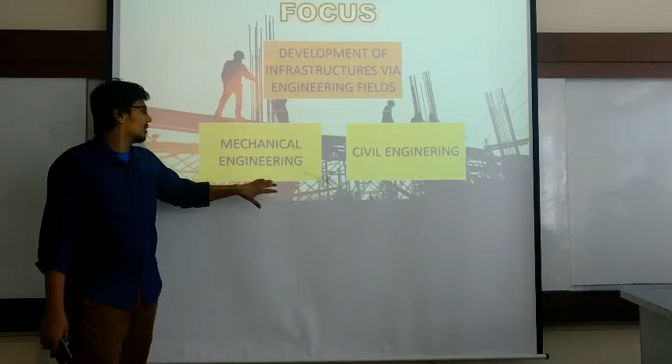Now I'll focus on our chosen theme, which is the development of infrastructure via engineering fields. Engineering fields are quite famous nowadays. Under engineering, we have chosen mechanical engineering and civil engineering as our examples for today's presentation.

First of all, mechanical engineering and civil engineering are among the fastest growing fields in globalization. So we will take these as examples for our further presentation.

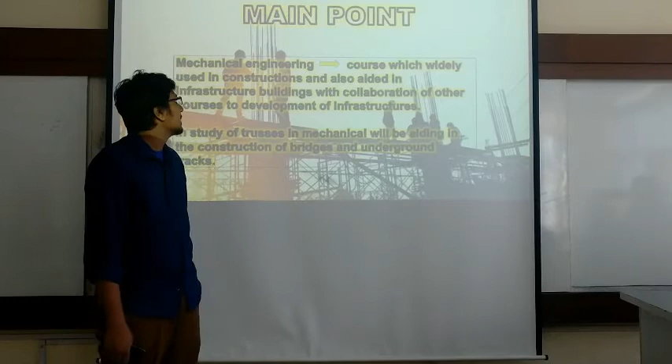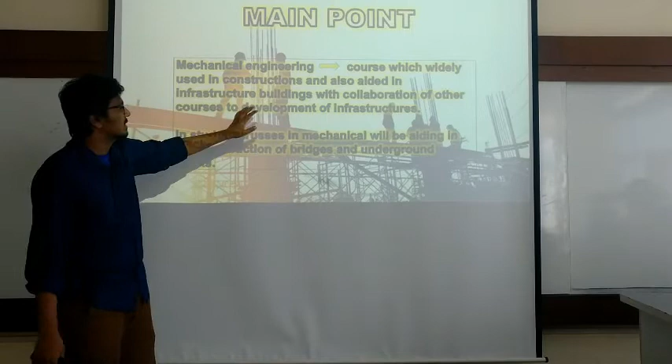Now I will take the mechanical part. Let's see what mechanical engineering is. Mechanical engineering is a course widely used in construction, aiding infrastructure building in collaboration with other courses for the development of infrastructure.

For example, the study of trusses in mechanical engineering aids in the construction of bridges and underground tracks.

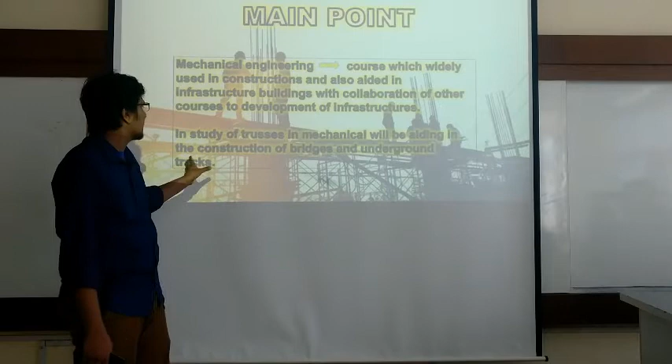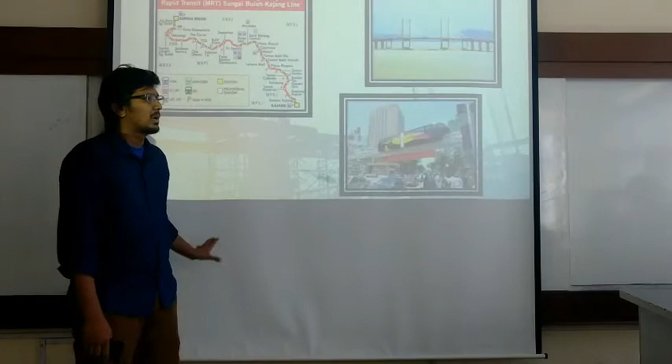For example, we have the MRT and some other examples. This is actually the latest MRT Sungai Buloh-Kajang line track, and this is the map of it.

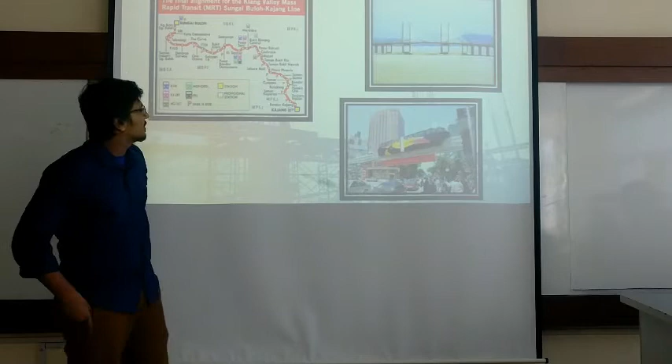As we can see, this is one of the highest budget Malaysian constructions, which had been aided by mechanical engineers and civil engineers, from our point of example.

And also over here we have the Penang Bridge, and this is also a picture of the monorail example, which has been transported through the city of KL.

So from here, I'll pass it on to my partner Mano Kumar to give a further explanation of the civil engineering course.

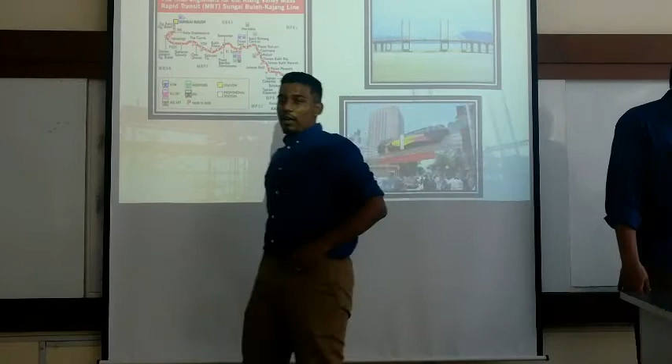Okay, hello guys, how are you all? I hope all of you are fine. Before I go to my main point on this topic, I would like to ask you all, how many of you are from the civil engineering field?

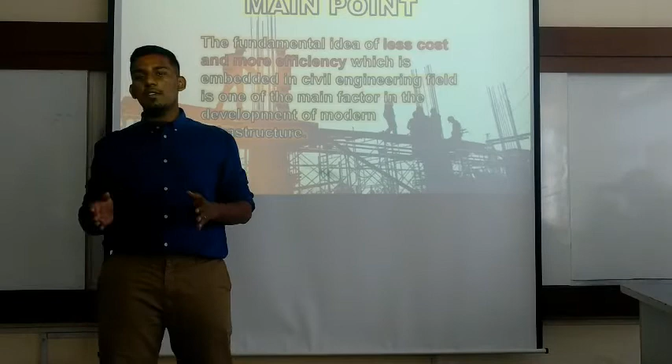Okay, so quite a number of you are taking the civil engineering course, and I'm pretty sure you have gone through 2 semesters, which is quite important, and you could have studied the basic things. So the main point here is one of the fundamental ideas in civil engineering.

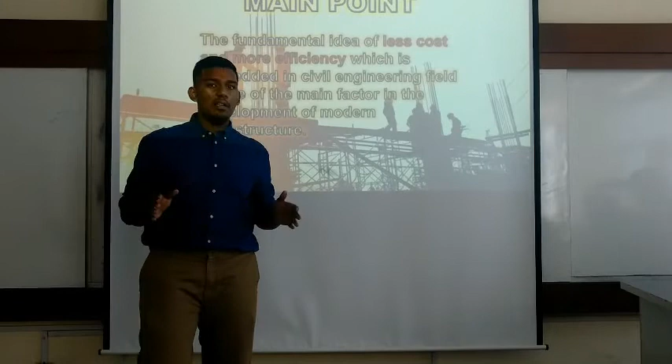As you all know, civil engineering is basically about construction. That's the basic thing people have told you before applying to university courses. So the fundamental idea of civil engineering, based on construction, is that less cost and more efficiency is the term we need in the civil engineering course.

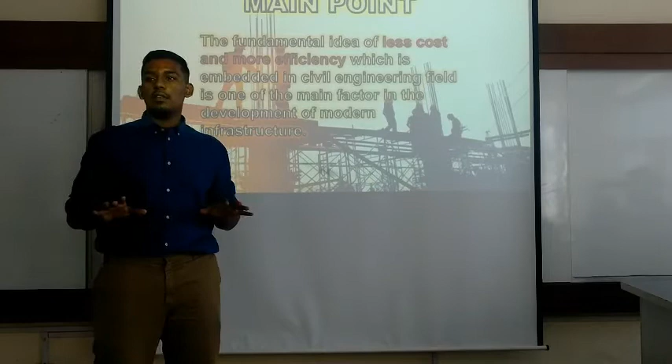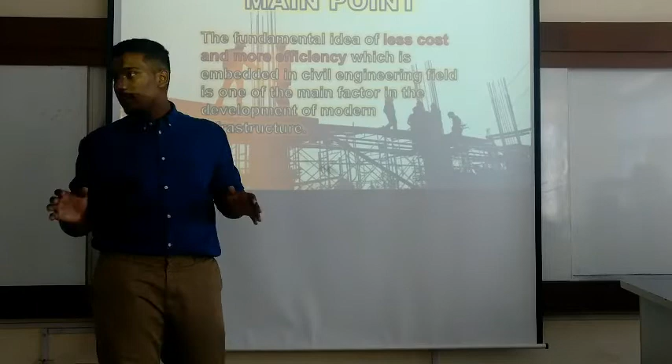As you can see, one of the main factors of modernization in the development of infrastructure in our country is because of this fundamental idea, okay?

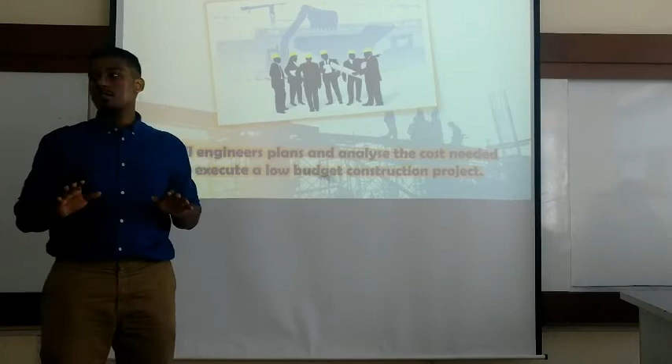The first important thing in this fundamental idea is that civil engineers need to plan and analyze the cost needed to execute a low budget construction project. As you can see, construction projects planned by civil engineers nowadays lean more towards the less cost and more efficiency term.

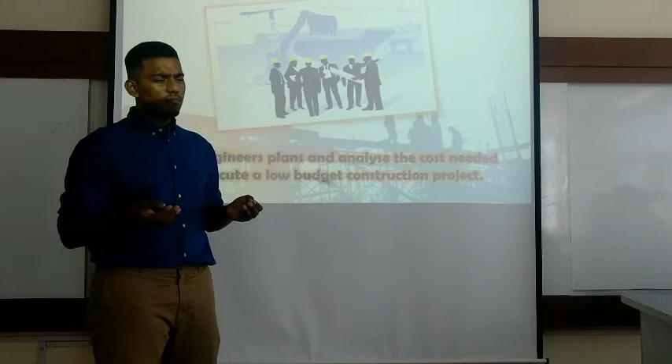As you can see in our next slide, the usage of plastic waste or industrial waste in building roads is one of the greatest examples we can find of making a project with low budget. It reduces the cost of the construction project through the industrial waste recycling method.

What can you all understand from the industrial waste recycling method? Anyone?

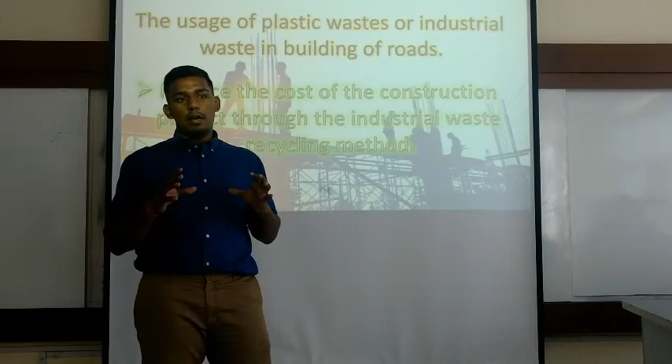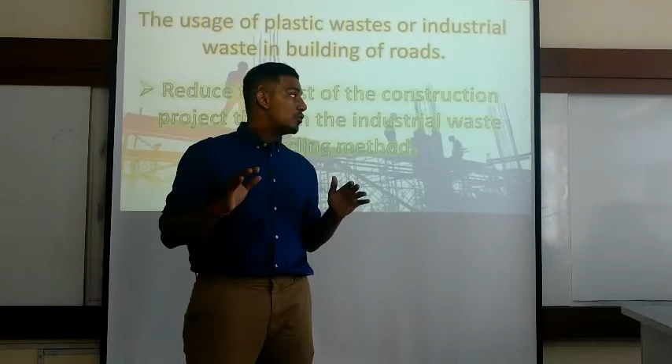I'll explain this through a video later, but first a brief explanation of what industrial waste recycling method is. I'm sure you've all seen debris and industrial waste that remains from construction projects. This industrial waste, or recycling waste like plastic bottles and papers, is used to make important elements for construction projects such as bricks, columns, beams, and other things. Next, we'll go into a video so you can see a proper example.

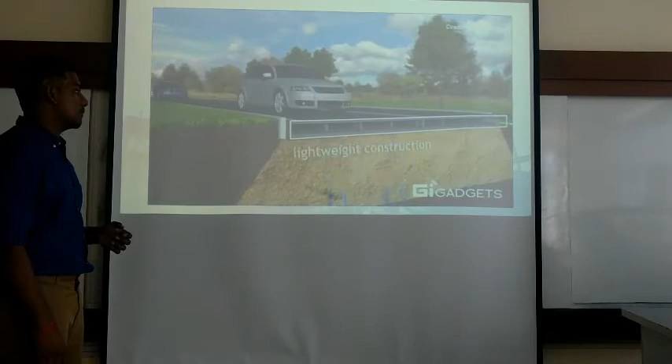Can you all see the modernization in road construction, where they use plastic bottles as an important element in construction? They showed real benefits, where the expected lifespan of these roads is quite longer than normal roads, and reconstruction, if there's any problem, is much quicker compared to normal roads. This is a proper example of low cost and more efficiency in modernizing infrastructure development.

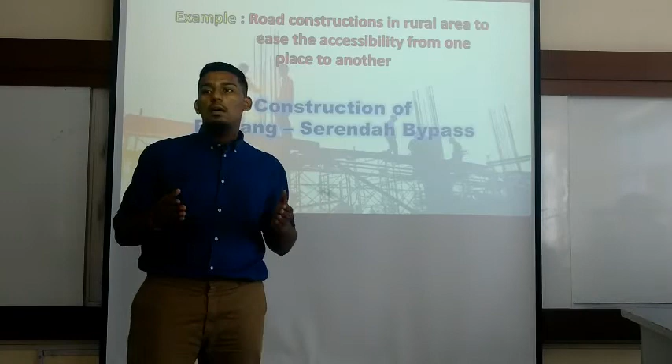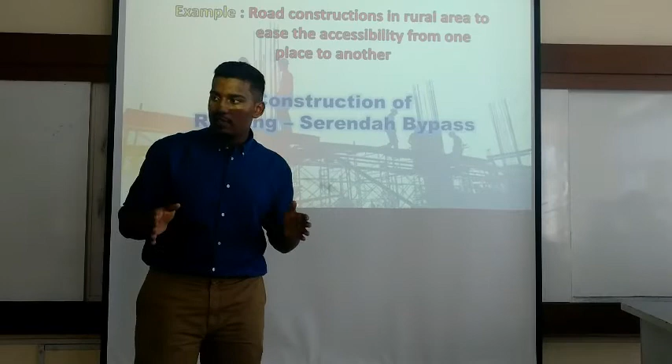Let's go to our next point. The development of infrastructure nowadays involves efficient fundamental structures required for the function of a community or society. This means development of infrastructure nowadays is more focused on helping the community or people in rural areas. For example, road construction and building construction are much more needed in rural areas compared to urban areas. This type of construction is made by civil engineers to help the people in rural areas.

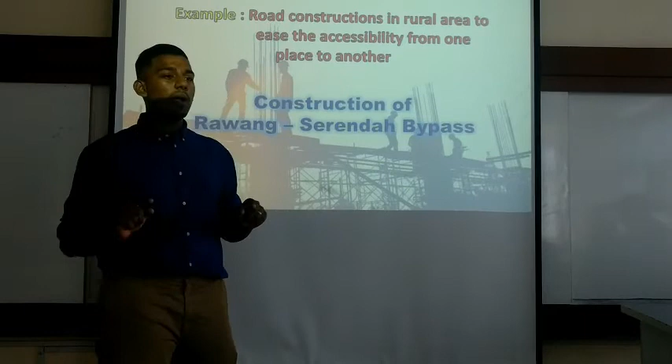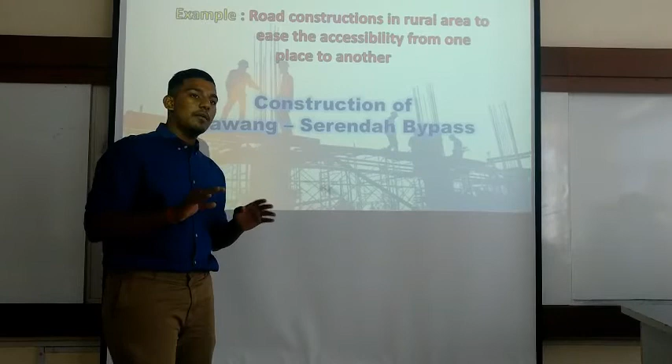One of the best examples is the construction of the Rawang and Serendah bypass. I'm sure you're all a bit aware of this construction, but the main purpose of making it is to ease the accessibility from one place to another. You're going to have a proper look at how the construction of the Serendah bypass is going to help the people in rural areas.

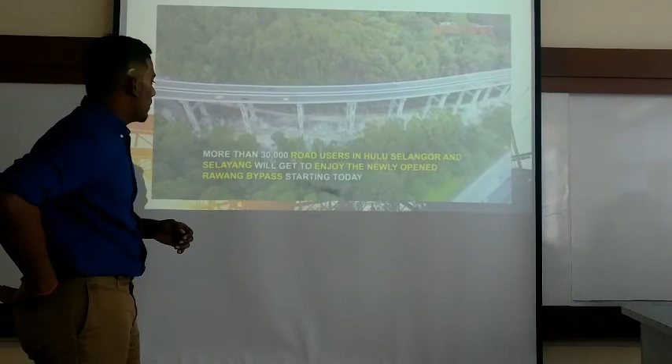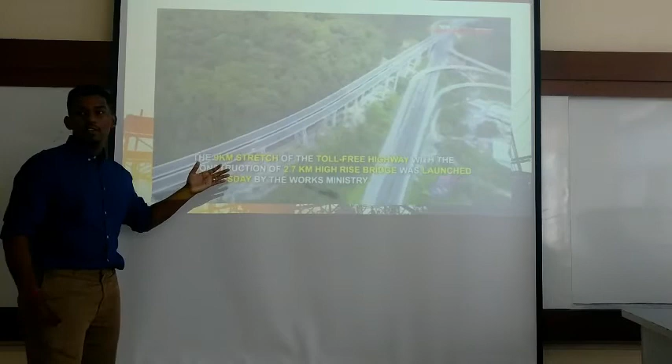As you can see, road users in Hulu Selangor will get to enjoy the Serendah bypass, which is quite long at a 9 km stretch - not a normal ordinary highway. It reduces their travel time during peak hours, which is much more important compared to urban areas. It is the tallest highway in the country, and the columns they use are among the tallest in Southeast Asia.

You can see the modernization in the development of infrastructure in rural areas, where it benefits a lot of people. Before we jump into a conclusion, there's a short video I need to show you.

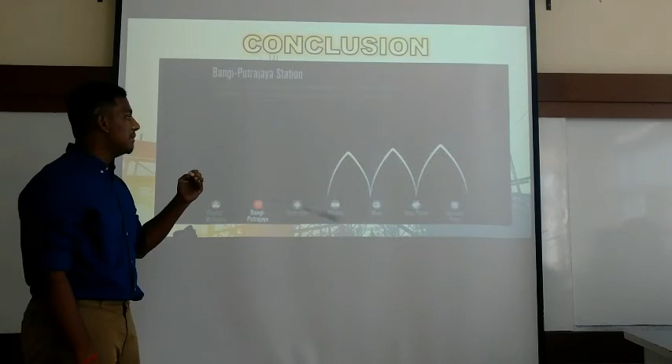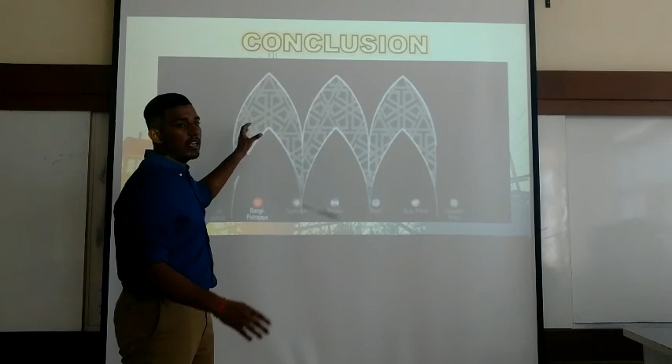Bangi Putrajaya - as you can see, we are building 7 types of stations here, and each station has its own identity. For example, the Bangi Putrajaya station is going to have a shape like the dome found in Putrajaya. These 7 types of stations, which are going to be built by 2020, are some of the greatest and most innovative constructions designed by engineers in Malaysia. Thank you.